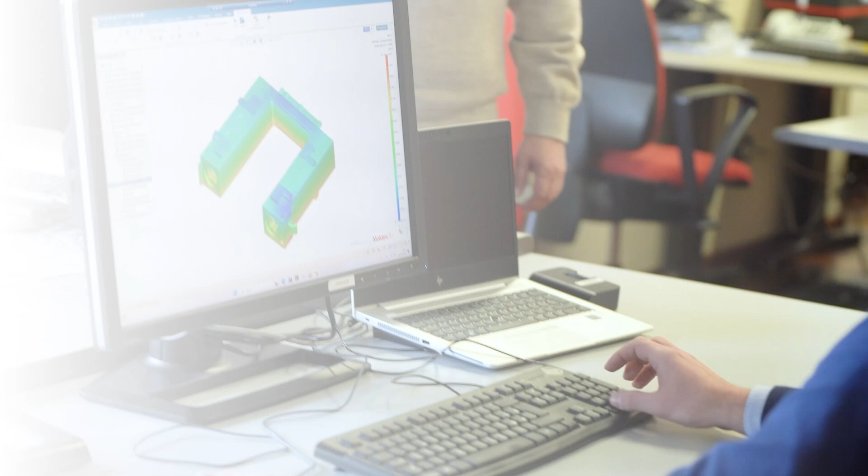So hello, my name is Luca Posca. I am the technical manager of technical assistance in LATI, and I have worked at LATI since the year 2000.

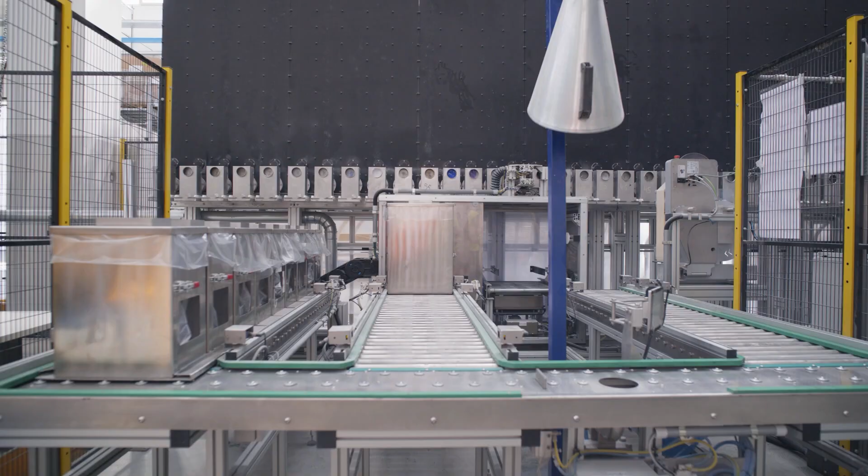LATI is an Italian independent compounder. LATI is a company producing injection moldable special compounds based on mostly any kind of thermoplastic polymer available on the market. It's quite important for us not only to sell the bag of plastic to our customer, but also to provide an extensive and high quality technical service, because it is absolutely fundamental that our customers shorten the time to market and proceed to production without the risk of failure.

Since 1995, LATI has decided to create a co-design facility, including structural analysis and filling and deformation simulation. In year 2003, I personally met Dr. Venny Yang in Chicago during the NPE fair, and I was amazed by the skills of Dr. Venny Yang. He described his project to me extensively. It took really a short time before deciding that we wanted to step into the Moldex 3D adventure and to understand how the software was actually performing.

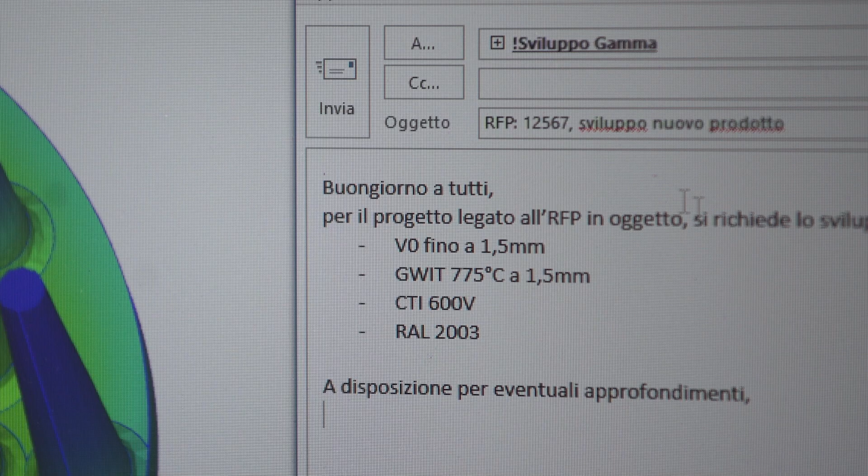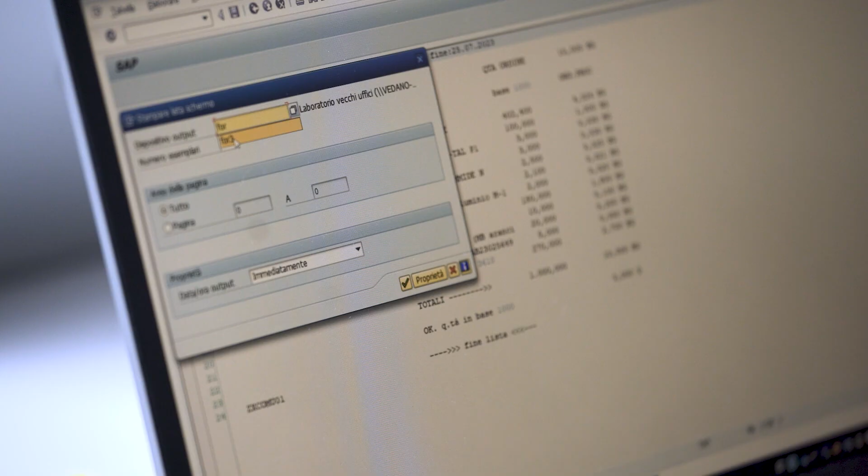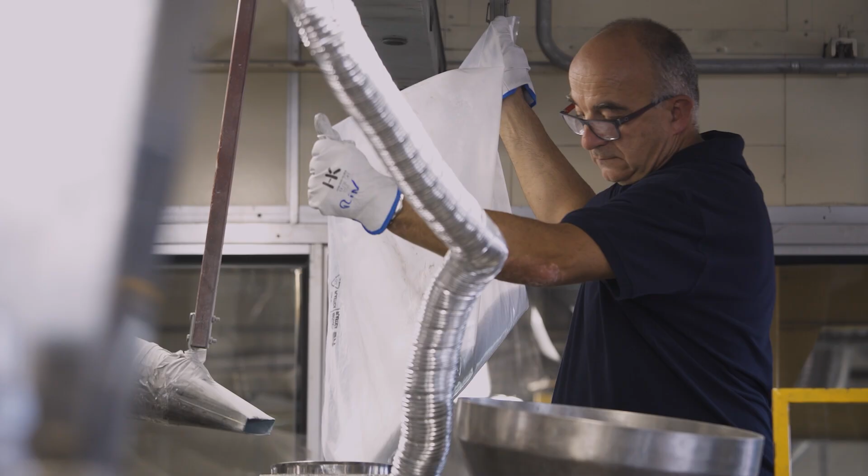We purchased the software and we started plenty of exercises to understand how it worked. Today I must say we are extremely satisfied with the software and the way it works, because the quality of the results Moldex 3D is providing to LATI and our customers is absolutely amazing. We use the software not only for the filling but also to solve the most complicated deformation issues, which is actually the most painstaking issue for our customers themselves, because our compounds normally need to have a lot of reinforcement inside, so they can actually feature plenty of deformation and problems like this.

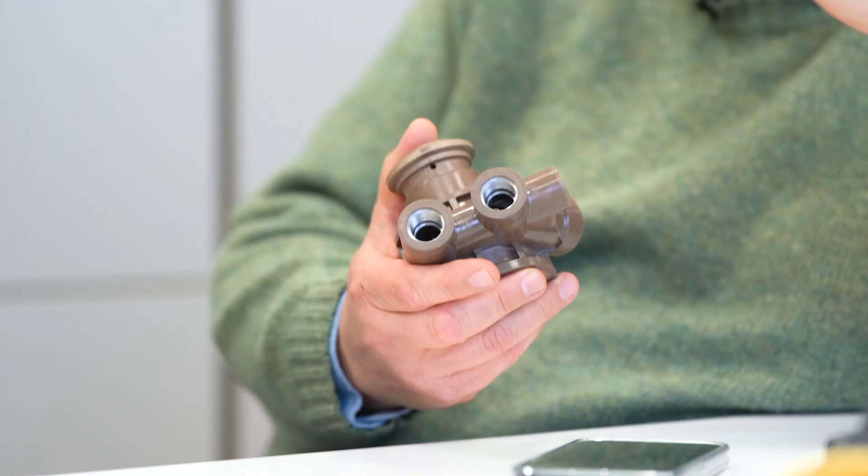To give you an idea, on such a part you have extremely high tolerances, below 0.05 millimeter. We have to be able to provide a solution to comply with the most accurate tolerances, circularity, planarity. And how do we provide this kind of service? The software is not enough. As you know well, it is absolutely fundamental to have accurate material description in the software. For this reason, we rely on Moldex 3D lab in Taiwan.

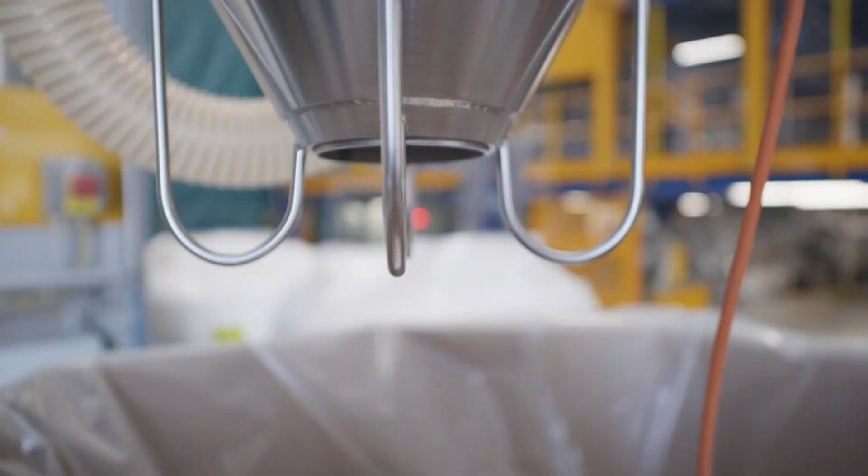We plan on a yearly basis a small lot of material characterizations. We send our newborn, our winning grades, our most promising and strategical compounds, including very complicated compounds: tungsten powder filled, thermally conductive, electrically conductive, carbon fiber filled, based on PPA, PPS and so on. We send this product to Taiwan, and within a few days we have it back. We have a very detailed characterization, including PVT curves, rheology.

In the last months, we also studied and we received a very accurate simulation of how to match Moldex 3D with structural and thermal simulation software, because we were among the first to introduce the influence of filler and reinforcement orientation in structural and thermal analysis. I think the first project dates back to 2017, 2018, something like that. In this case, the results were absolutely amazing. We were able to use the orientation tensor generated by Moldex in the structural and thermal simulation software, obtaining mind-blowing results. And this really was a big success.

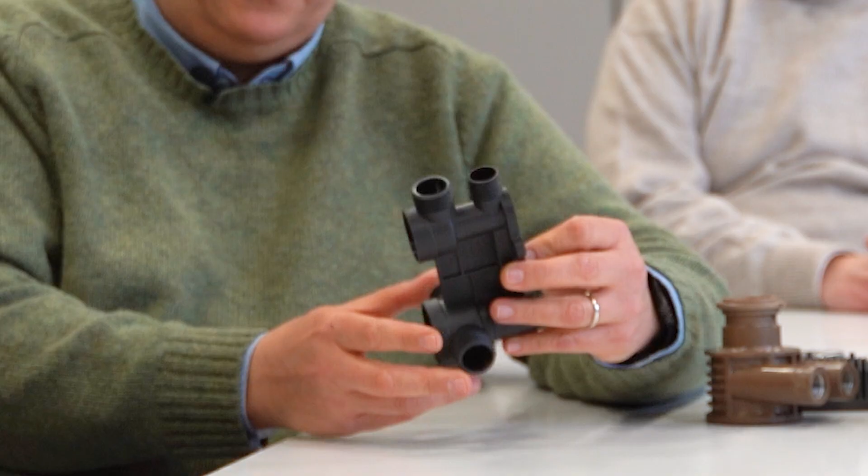LATI's customers produce very complicated parts, so we are involved in many challenging problems, including metal replacement problems. This is not very recent but very interesting, because it was a brass replacement. The part was a massive chunk of brass, and the customer wanted to replace brass with plastics. There is contact with hot water, so we had to choose a semi-aromatic polyamide reinforced with 50% glass fiber.

As you see, the mold is quite complicated because we have threaded sections. We performed the simulation and the goal was to ensure planarity here and perfect circularity of these threaded sections. And this was a very challenging part because, as I told before, the tool is quite complicated. So we had to study the injection layout. It was a 2-cavity tool with a very complicated setup, and the results were really amazing.

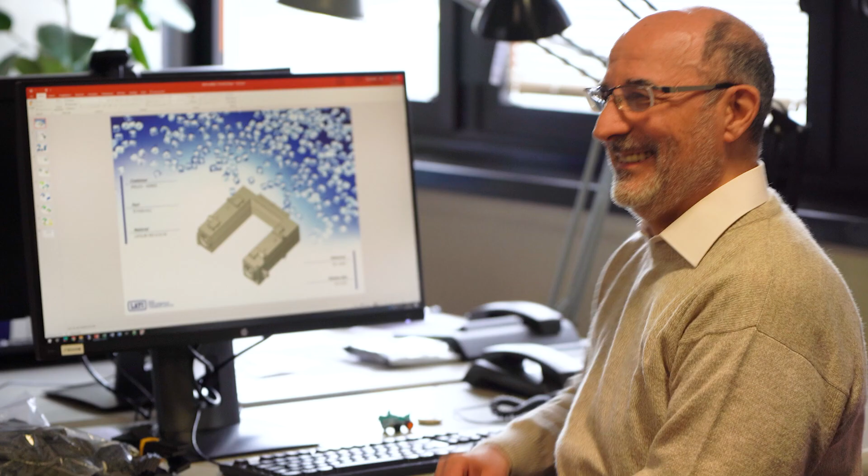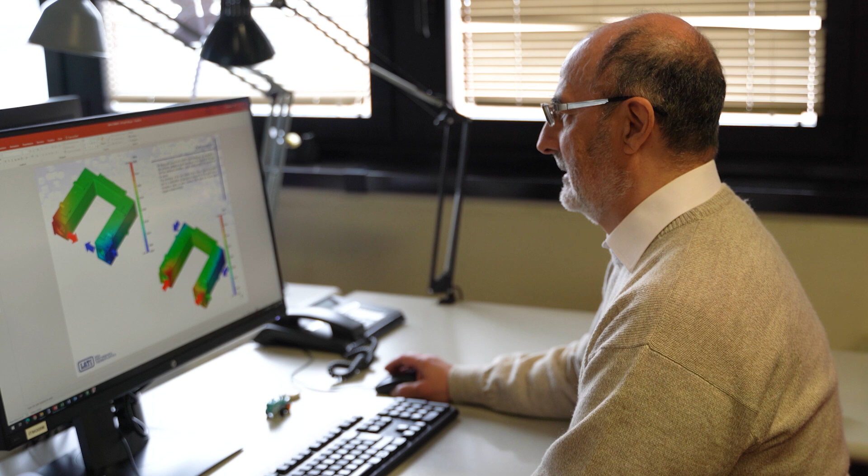Well, I can say that it is very fast, because compared to other competitors, the response is very accurate and fast. I completely appreciate this support. Sincerely speaking, starting from the Studio, now it is very easy to use, even compared to other softwares. In this case, it's also the post-processing, because you need to correctly examine the results. So it is important to have a good appeal of the result that you are reading.

Our customers are not focused on one specific industrial sector. We normally deal with electric and electronics, so miniaturization is one very important issue. But we also deal with appliance producers, automotive producers, with fine machinery, with high precision mechanics. All these kinds of different geometries must be correctly processed in our co-design facility with our products. So it is fundamental that the software we rely on is capable of processing challenging geometries with tools and materials. That's the reason why we rely so strongly on Moldex 3D.